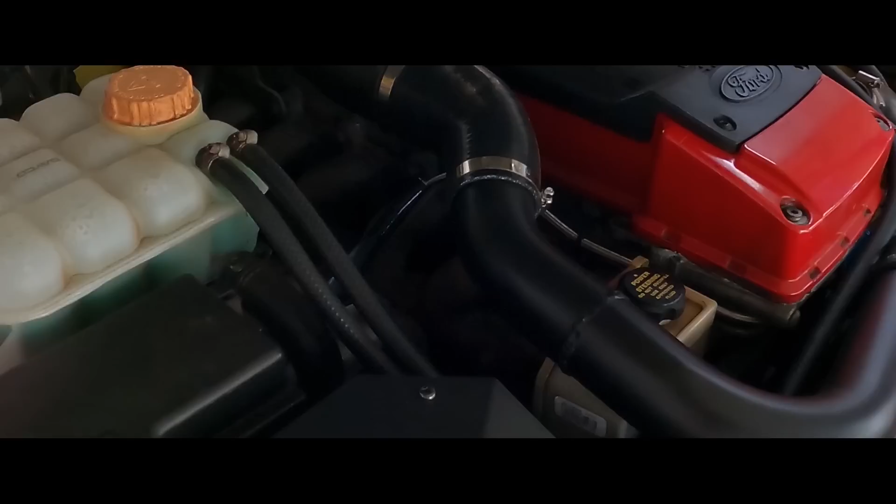It is freezing cold today, but look at what's back here. Everyone's favorite 3RZ Hilux. Look at this thing. Yeehaw. What a beast. Anyway, for those of you who remember, this thing was here previously. Turbo 3RZ, Haltech Elite 550 with a Whitey's wiring patch harness to suit the 3RZ. Yeah, really nice little setup. I can't remember exactly what turbo's on it, but we did have a couple of issues last time it was here. So it's back.

So one of the issues is the cold start. The cold start needs a revisit, which I've been working at this week. We've got it pretty good now. Pretty happy with it. I wasn't sure whether we're going to have to put an IACV in it, but it actually seems like it's doing pretty well, and I'm pretty happy with it the way it is. So might get away with not having to put an IACV in it.

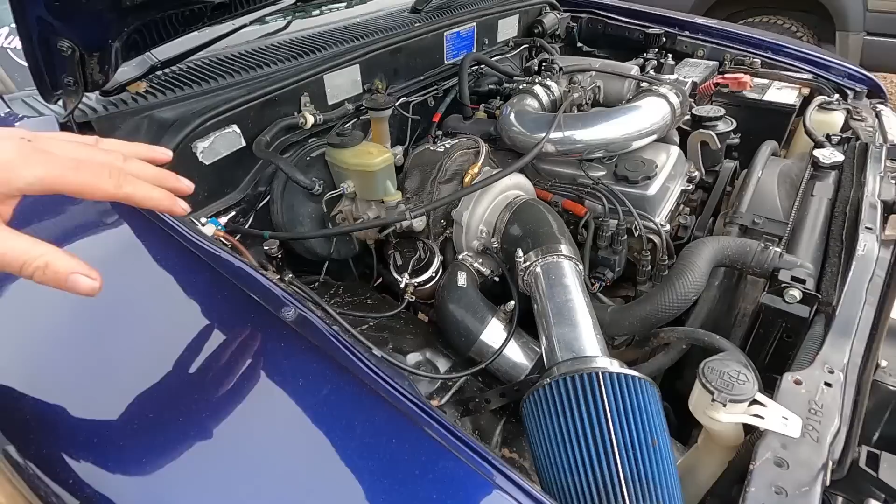But one of the big issues we had with this car when we first tried to tune it was boost control. We had a lot of issues trying to get the boost under control. Well, it's a 6 boost manifold. We've got a Turbosmart Hypergate 45, which should, in theory, suit the size of the turbo and housing on this 2.7 litre. I suppose 2.7 is quite bigger, but we just had issues controlling boost. It just kept running away on us.

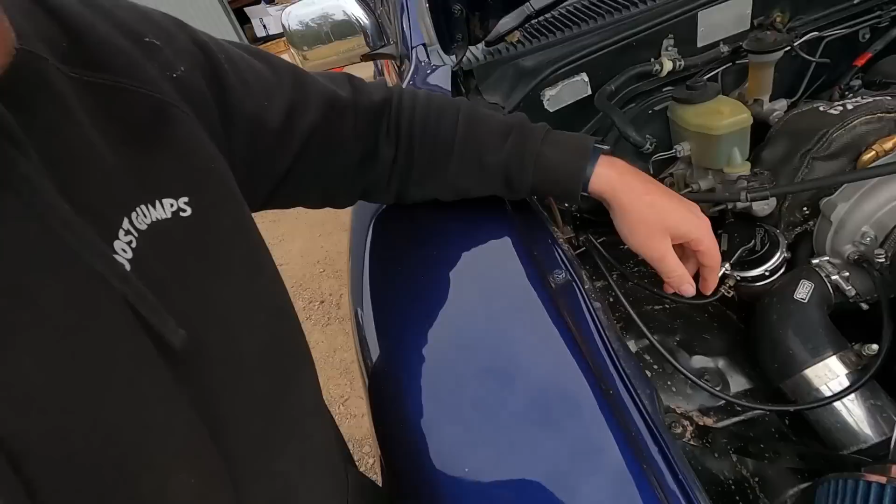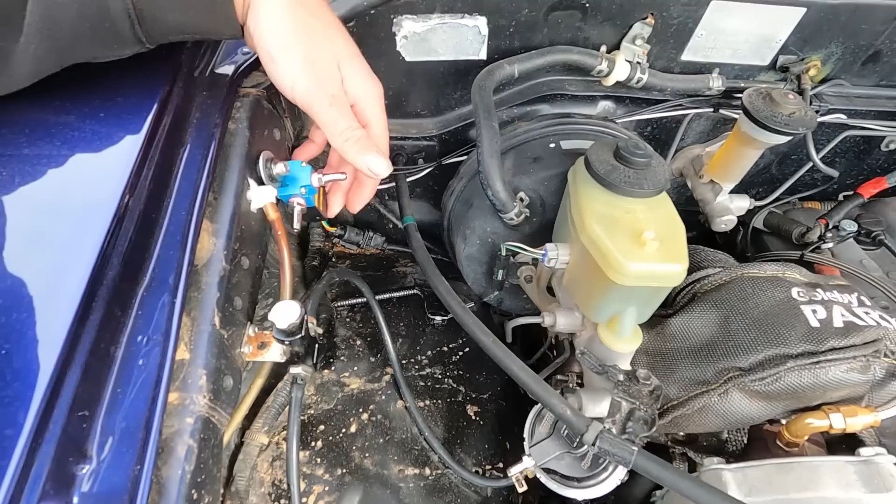And obviously at that point, we just had the trusty old Turbosmart boost tee up here. So, you know, when boost is starting to run away and the only option you've got is to bleed it off, you're really limited with what you can actually do, because you're stuck on one duty cycle, which is whatever you're bleeding off out of the boost tee. So what we've got now is actual electronic boost control from Haltech. This is wired into the Haltech, so it's ECU controlled.

And the reason this helps a lot in this situation is that we can jam heaps of duty cycle in down low, really get this thing up on gate, and then when it's starting to run away, we can start to pull the duty cycle out in those areas where we have to get it under control. But it doesn't limit us to one duty cycle across the whole board, which helps a great deal.

So a few things he wanted us to revisit as well, things like the limiter type and where it is. He wants to bring it back a bit and set it to a bit of a harder cut. He wants to be able to limiter bash up the beach, which is fair enough. Nothing too crazy, but it'll be interesting to see what we can get out of this thing. It is on bigger tires than last time, so it might actually go backwards as far as wheel horsepower is concerned. But anyway, just a revisit on the tune, get a few things nice and crispy, and get him back out having some fun.

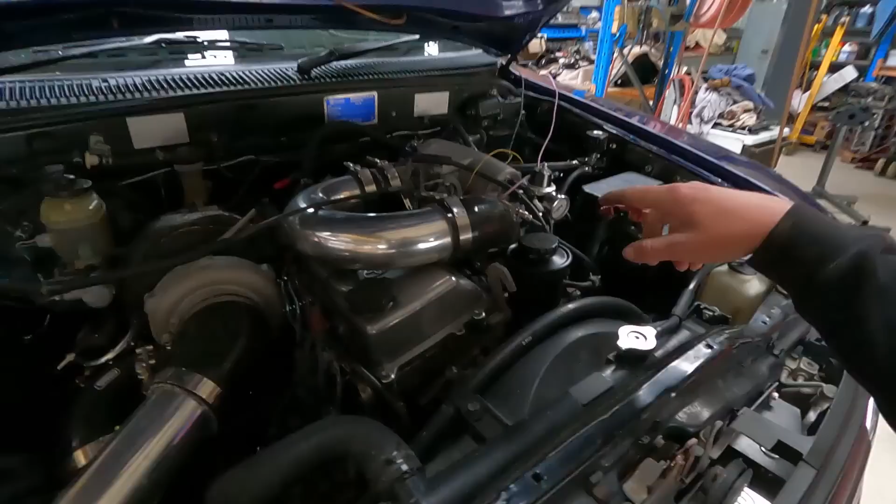So just started doing a few runs. This red is the last run from last time it was here. This is not the most power it made. This is what we turned it back down to as a safe tune because we had issues controlling boost. And I'm pretty sure we told him if he went up 2 clicks, it would go back up to pretty close to 15.5 or 16 pound, which is where we made close to 270, around that sort of power range.

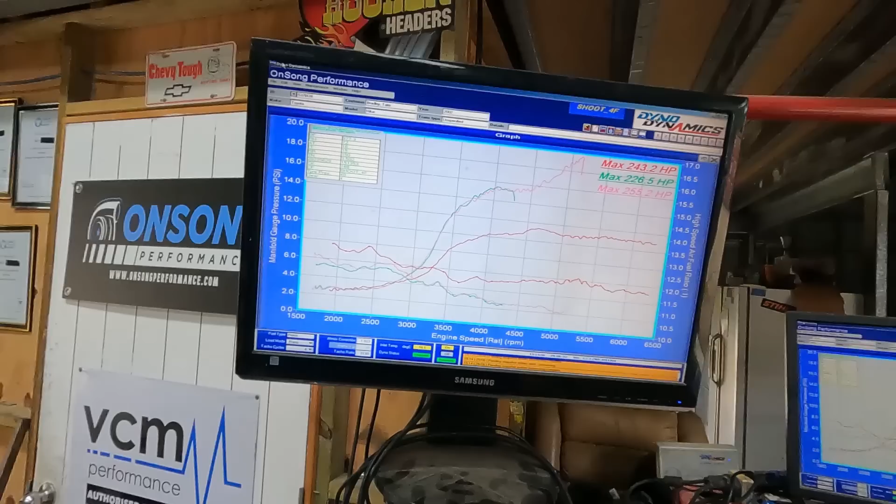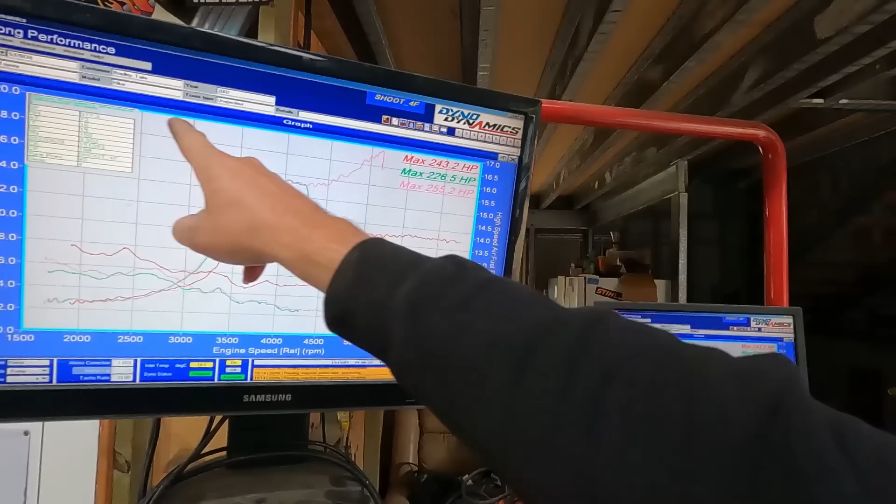He did tell me that whenever he wound it up last, he wound it up so that it was running 16 pound. But what I found here on the dyno, fully loading it up, my foot in it, is exactly what we found before: the gate's cracking, but it's just starting to run away at that boost level. So as you can see, it's starting to run out. We're starting to get up towards 20 pound there, so got out of that one. So yeah, it's not super happy with trying to run that much boost.

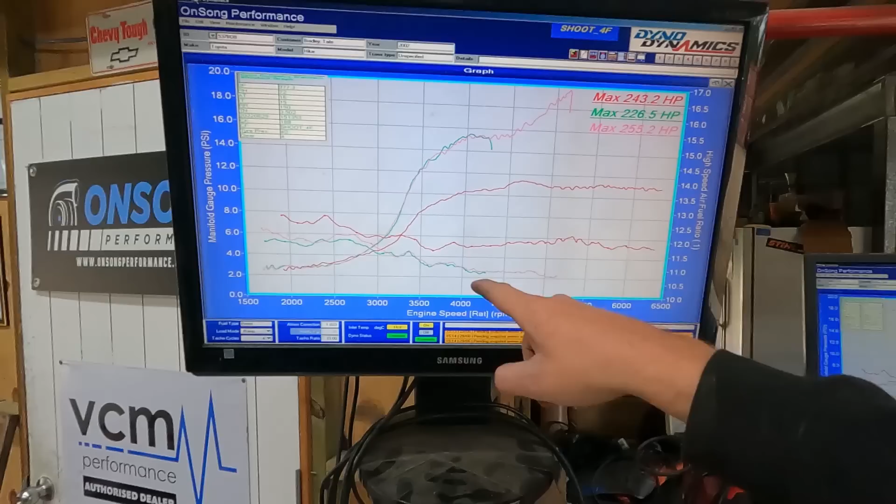Not from the boost tee, and obviously it's super rich in these areas because they weren't part of the map that I tuned previously, because we just couldn't get there. But you can see, I think this is basically a result of that new exhaust. Having that bit less back pressure is really allowing this thing to spool up quite a bit more. So there's a few of those transitional areas. But anyway, that was just a test to see where it's at.

Where he's turned it up to, it's obviously having a bit of trouble maintaining that boost pressure. It's one of those things where if you're just driving around the street or at the beach and you're just giving it stabs and stuff, you probably wouldn't really notice that much. But obviously when you load it up on a dyno and you've got consistent load for a full RPM pull, you start to really see what's going on here.

But anyway, no harm, no foul. Motor's still alive, everything's still happy. So he obviously hasn't driven the wheels off the thing to where it's done damage or anything. And it is pretty rich and fairly retarded up in that area for that reason, because we were a bit worried about it when it left last time. So anyway, that's good enough. Time now to switch us over to the Haltech boost control.

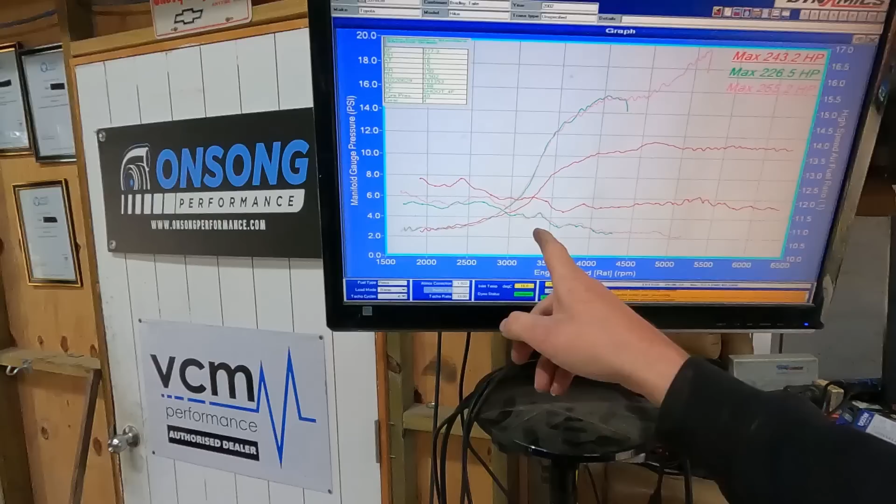And like I said, we can jam 100% duty cycle in these areas to get this thing up on gate. And then up in this area where it's starting to run away, we can just pull it all the way back to no duty cycle and hopefully try and maintain what the gas is doing. It might end up fairly linear just to try and maintain the gas flow, but it is what it is. Not much else we can do about it.

Just work around the boost control issues we've got and do the best we can with what we've got. So we'll get the boost control set up and go with that. Might even set it up with closed loop boost control this time. We'll see. All right, boys and girls, we've got problems.

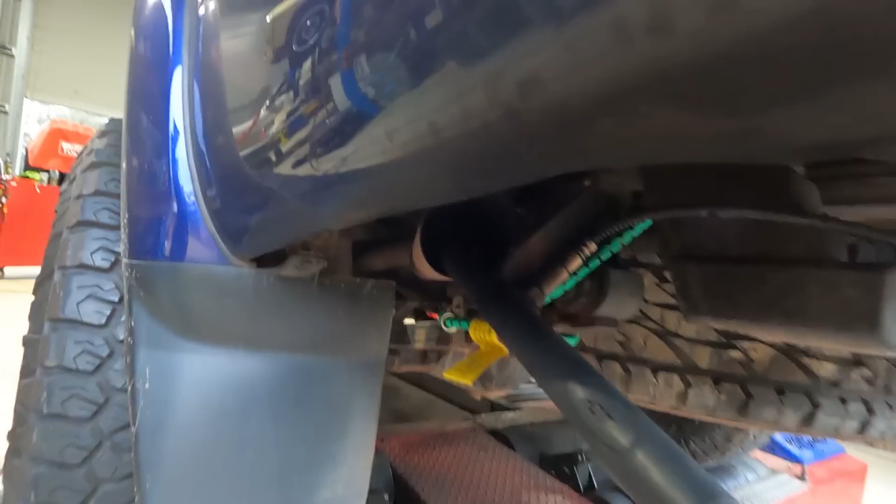First problem, I didn't realize until Rex walked around the back of the car before, but that's just not what you want. His new exhaust hasn't pointed down enough away from the cab, and it's caught the exhaust all up under the panel and just melted the tail light. So yeah, exhaust routing is important. Very sorry, Tate. Obviously I was in the car, so I didn't pick that up until Rex went for a walk and came back. So unfortunately, tail light's a bit melted.

Obviously we didn't build the exhaust, it's not really our fault. I'm just sorry that I didn't pick it up earlier before it did that sort of damage. But anyway, the second issue we've got is boost control. This thing just will not do it. So this is the same issue we were having last time.

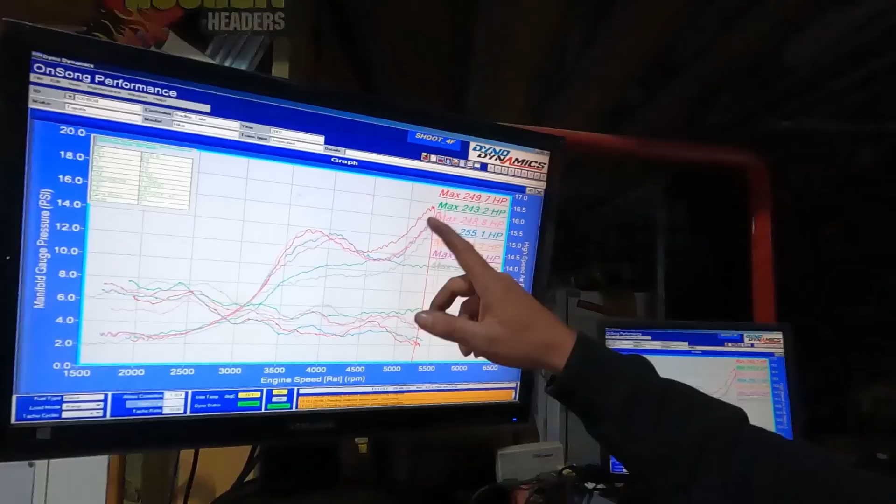It's the same issue you saw today with the boost tee, when it was turned up, just running away. Now last time with the old exhaust, we managed to keep it under control at around our 11 pound, 12 pound. We did manage to control it. It was happy enough to divert that much gas.

So what I found with this, because the tune wasn't too far off, I was like, oh, we'll have a go at setting up the closed loop when I get over to the Haltech things. Started having a go, and because of just the sheer drop off of duty cycle, I was trying to get into it to stop it from running away. The closed loop was having a bit of a shit fit. It was getting pretty hard just because it had to drop so much duty cycle so fast to try and

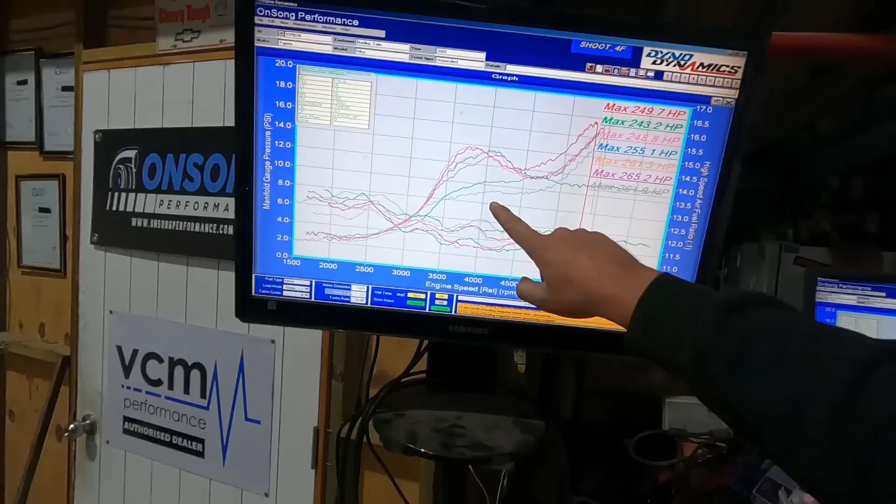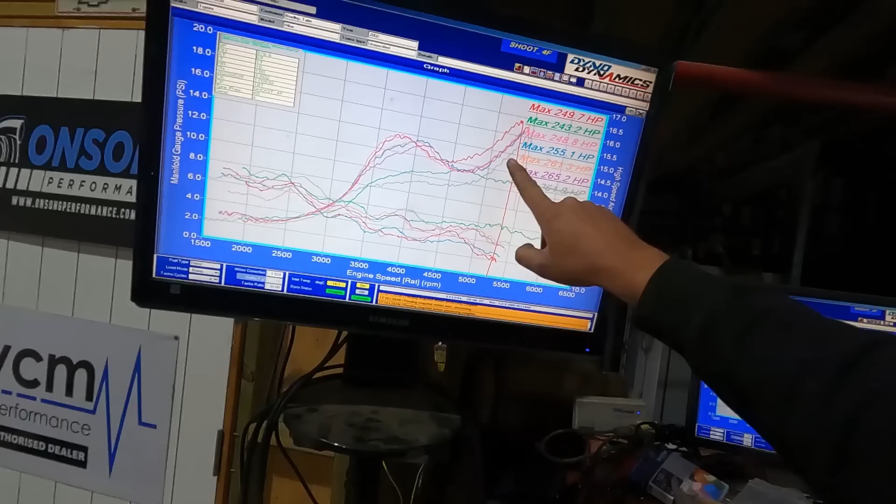control it. So I thought I'll turn all the boost control off, just run it on gate pressure and see what it does. And that was this grey run, which as you can see, just on gate pressure, nice, even rise, and then just starts to run away as well. So it's doing the same thing. It's shooting for 17 PSI by the time we're hitting about 5.5. This is a bit late, this is actually closer to about 5.2. And it's just shooting for the sky for 17 PSI.

Yeah, there's not really much else we can do. So the main difference is obviously going to be that exhaust. Being that the exhaust is a lot freer flowing now, we're obviously seeing this thing spool up a bit harder. So what you've got now with better exhaust and better flow, you've got a bigger pressure drop across the turbine. You've got a higher pressure differential across the turbine, which makes it more efficient.

So now with the bigger exhaust, it needs even less energy to do what it used to do, which means the gate has to divert more gas in order to get it back to where it was. So what we've ended up with is, because the new exhaust is making the turbine more efficient, the wastegate's having an even harder time diverting enough gas to keep it under control, to the point where even on gate pressure, this thing is just running away and there's nothing else we can do about it.

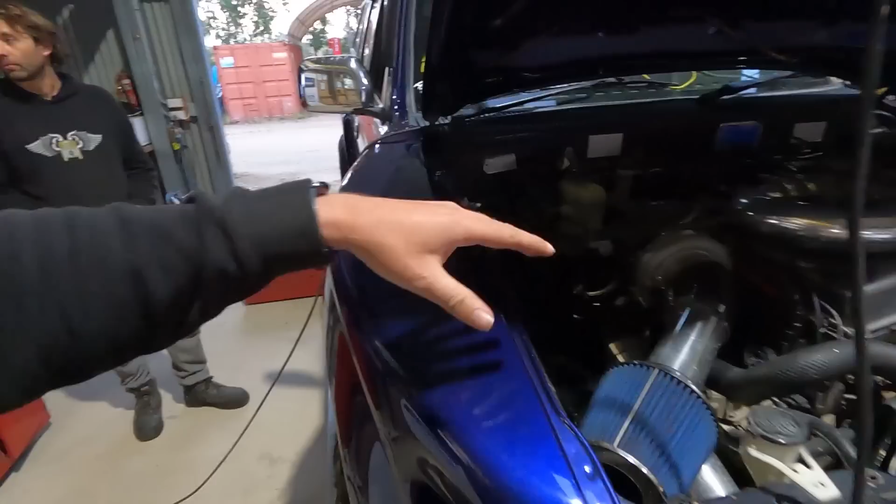So that is the issue we're facing at the moment, which is a shame, because it's not like he's half done anything. Everything here is right. We've got 6 Boost manifold, genuine Garrett, I believe it's a GTX 3076, and your Hypergate 45 from TurboSmart, which is a really good gate, and it's the size gate that the manifold

provision allows for. So basically, unfortunately, it pretty much just comes down to, I think, a not so ideal manifold design for priority flow to the gate, is what it appears to me. It's either that or the gate could just be too small. But even in that case, you'd think that the provision for the wastegate would then be a lot bigger than it is. But righto guys, well I guess at this point I'm gonna go home.

It's late today anyway, we're out of time today, but I'm gonna go home. I'm gonna have a talk to a few people that I know are 3RZ nuts. Have a chat to those guys, get a bit of an idea of what we might be able to do as far as what's safe on something completely stock. And then I'll have a chat to the owner, and I guess we'll pretty much decide at this point.

The only real point of call is if he's cool with it and everyone else reckons it might be all right, we'll just keep running it out, see what boost it ends up at. Maybe it'll start plateauing at about 20, or maybe we'll start to hit limiter by the time it's hitting about 20. And maybe at that point we just tune it to 20 pound and see how it goes.

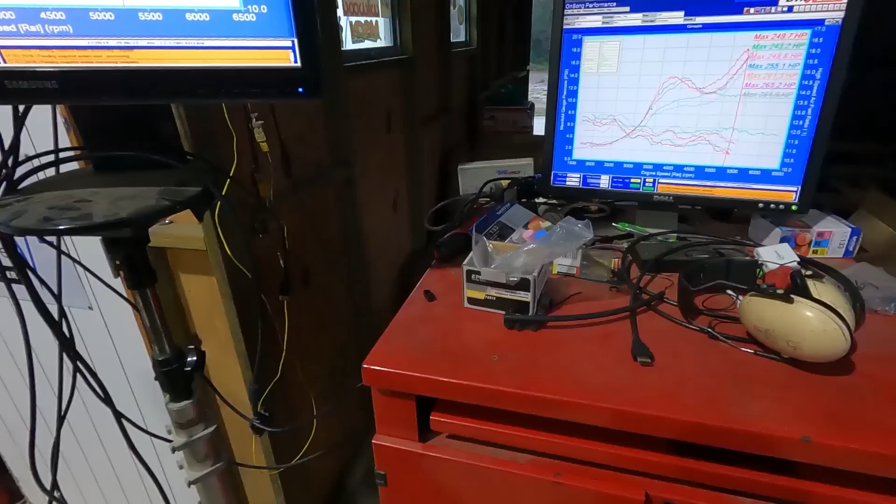What are we tuning it to? Oh, yeah, that's scary, eh? If you want to go that much further. Well, we don't have to. I'm pretty sure we set the limiter at 6, but I think power starts to fall over before then. Okay. So it's not going to be that big of a deal.

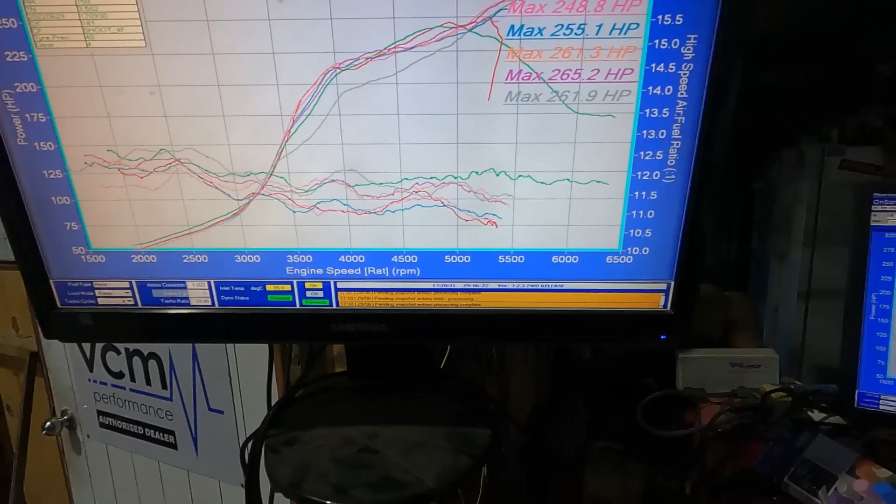So this green one's the one from before where we kept boost under control. And you see at 5 grand, power's starting to fall over anyway, with the boost control set normally. So if we only tune it to 5.5 and set the limiter to 5.5, no one's going to really miss that. Yeah, just pull it up with a limiter wherever we think is safe, and that's it. So that's probably realistically only another 300-400 RPM.

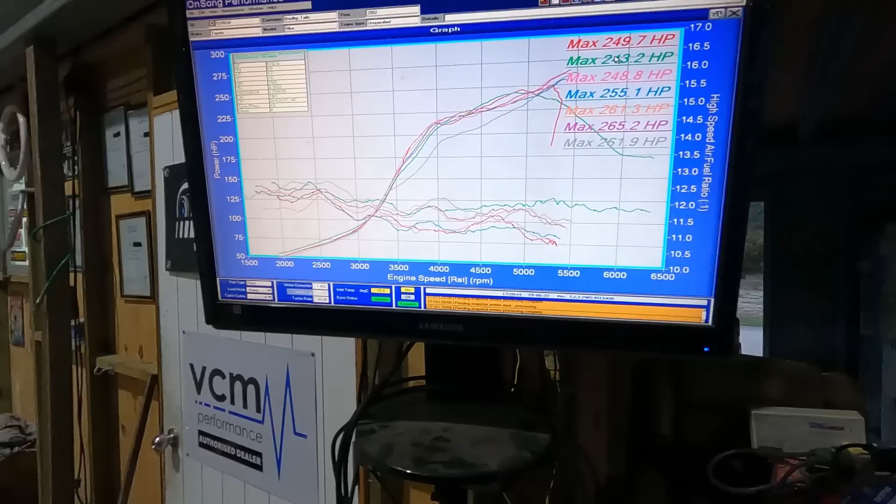How much more boost can we realistically get into it? Just knowing Toyota stuff, I would expect a 3RZ to be fine at 20 pound. I expect that it will be as well, but I just want to get confirmation from a few people and confirm that with the owner before I go running this car all the way out to 20 pound out the back door.

So, as Max and I were talking about before we started recording again, we're having boost control problems, so you can't just pull a heap of timing out at 20 pound so that it's not making power to try and keep the engine alive, because that's going to exacerbate our boost control problem. So it is a problem.

Obviously, the more timing you pull out, the more of the combustion event is happening in the exhaust stroke, which means the more energy or heat you're actually putting into the exhaust, into the runners, into the manifold. So what you're actually doing is increasing the exhaust pressure and thus increasing the boost. So just pulling timing out doesn't work for these things.

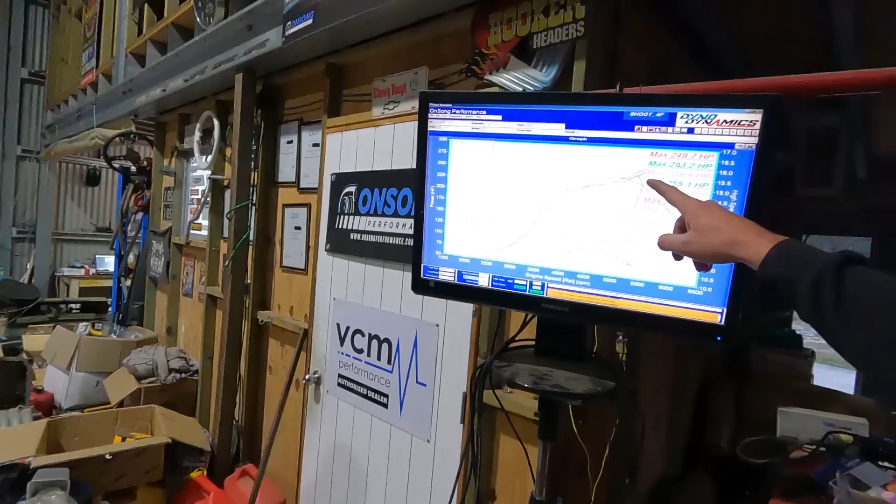Which honestly, the fact that this is spiking to 17 is probably not helping, because in those areas of the map where I didn't want it to be, I wouldn't have a lot of timing. So at those areas, it probably is getting worse. So once we start revving it out, timing would help. Yeah, maybe if we let it run out to 5.5, maybe it'll hit 20 pound as it is.

Maybe we can start throwing some more timing in up around those areas. Maybe we'll be able to get it back down and control it at around 18 or something, which might be ideal. So anyway, I'll have a chat to the owner. We'll see if he's happy to do that, and we'll go from there tomorrow.

So righto guys, I had a chat to the owner last night, as well as quite a few other people that deal a lot with 3RZs, a lot more than we do, one of them being the Hoff. I know he does a fair few RZs, so we had a bit of a chat to him. Basically what we've decided between what we found out and talking to the owner this morning is we're just going to pull this thing up at 5.5.

At the moment at that 5.5, it might go 17 to 18 pound, but right in the top end like that, it's not huge cylinder pressure, and it is controllable up until that point of 5,000 RPM. So we can control the boost input through the maximum brake torque, through the peak cylinder pressure areas, and try and keep this thing under control. It shouldn't have a problem.

As far as safety goes, that shouldn't be unsafe for this thing to be making that sort of boost right in the top end where cylinder pressure isn't super terrible. It's already fallen over at around 5,000 anyway with boost stable, so pulling it up at 5.5 I don't think is too big of a deal. And I'll have a bit more of a play around with the closed loop today.

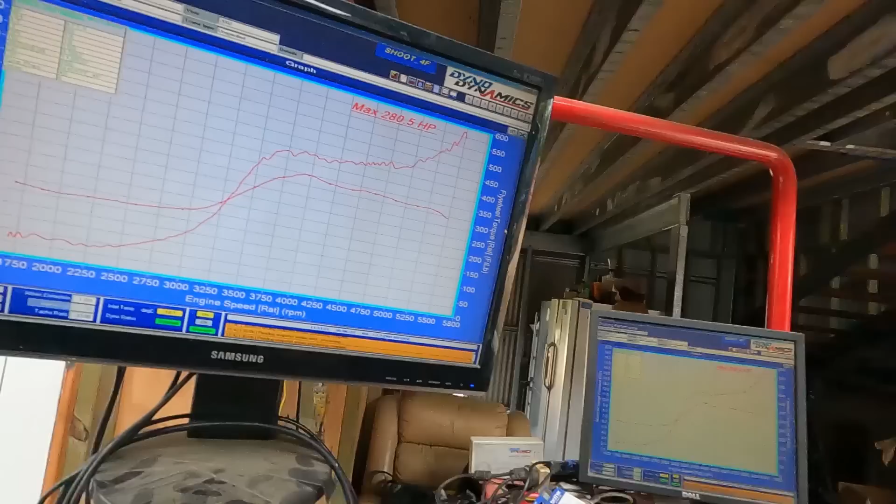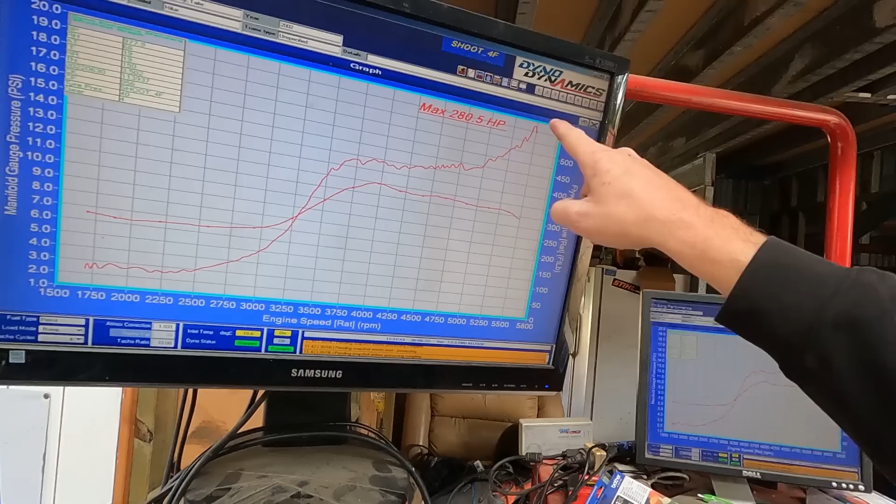As you can see, we've got maximum torque up around 4,000, and I managed to keep a fairly consistent torque level, kept a lot of the timing out of this maximum brake torque area. Boost-wise, we ended up ramping it into about 10 pound, and then tried to keep it fairly consistent through that maximum brake torque area. Didn't want to put too much boost into there and started to slowly ramp it in and let it run away up to, as you can see, this run, turned it out to 5.5.

So I was consistently doing really well with it set at 5.2, and I thought I'll just do a run at 5.5 and see what it does. And sure enough, it's starting to shoot for close to 20 pounds. So we did make our 280 at 5.5.

But I did pull another 250 RPM out. It was still quiet on the Plex, on the knock monitor. Like, it wasn't knocking, it wasn't loud. It doesn't seem too unhappy around 20 pound, but I just figured it's not really necessary. I know that he wants to take this up the beach and bop it on limiter, so it's not necessary to have it at 20 pound while he's doing that. It's just not a necessary thing.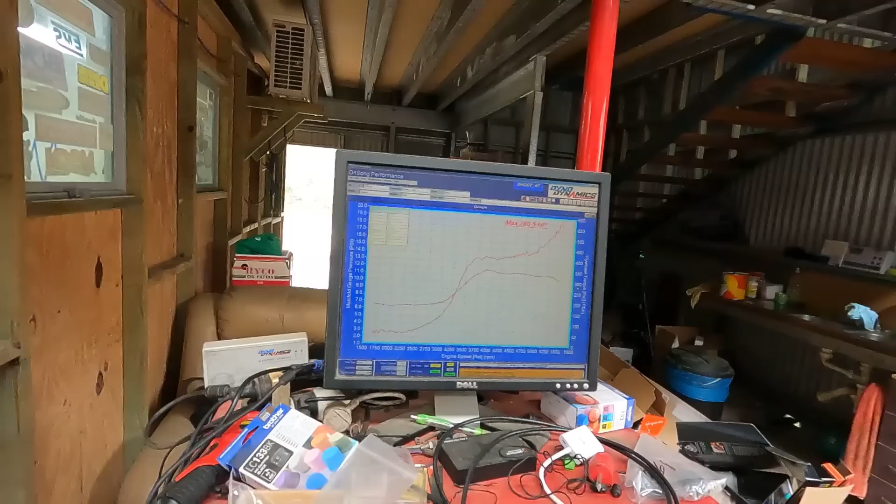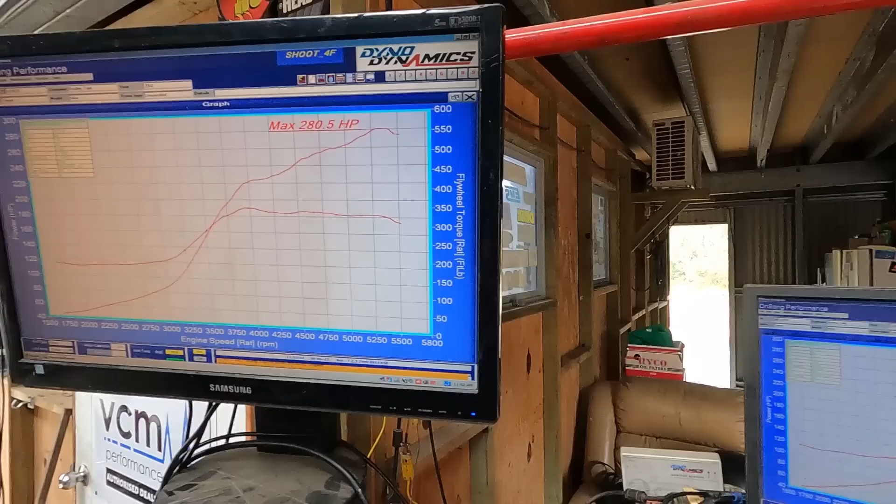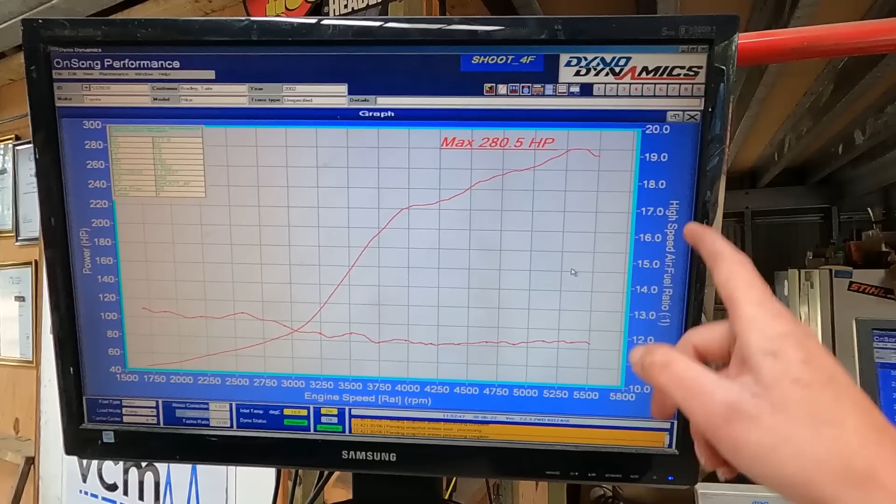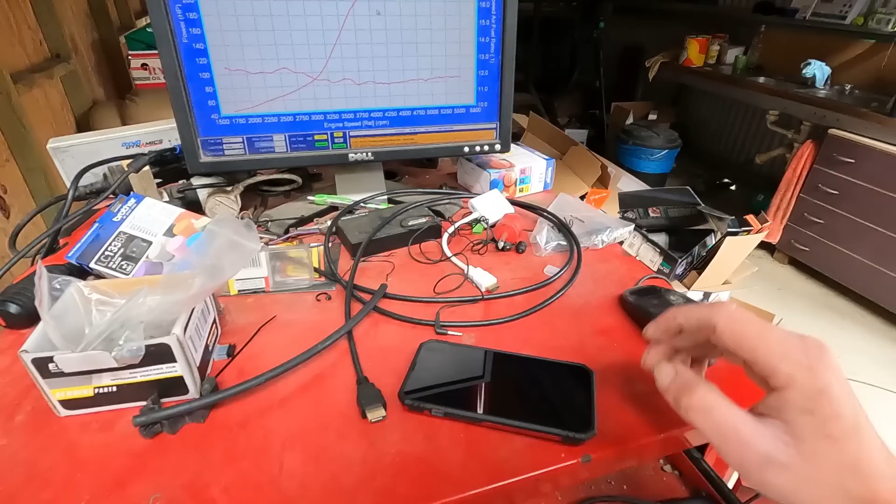So boost ended up really good, really happy with the boost curve. Our power, as you can see, we're making sort of peak power still. It still wants to go. This new exhaust has really opened it up, and it wants to just keep going. 3RZ things, I suppose. And yeah, super happy with the fuel as well. So everything's come together really well, except for, like I said, I did pull another 250 RPM out. So regular runs did stop at 5250, which, I'll pull up another run for you guys. I think the last one.

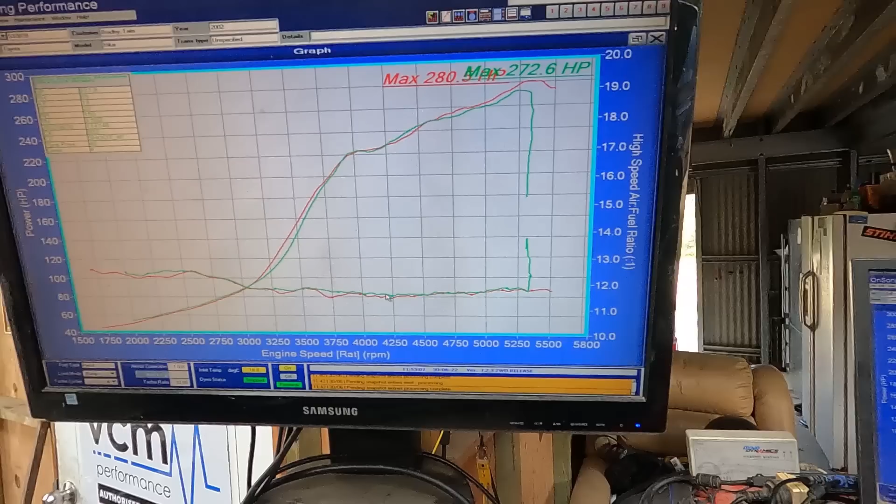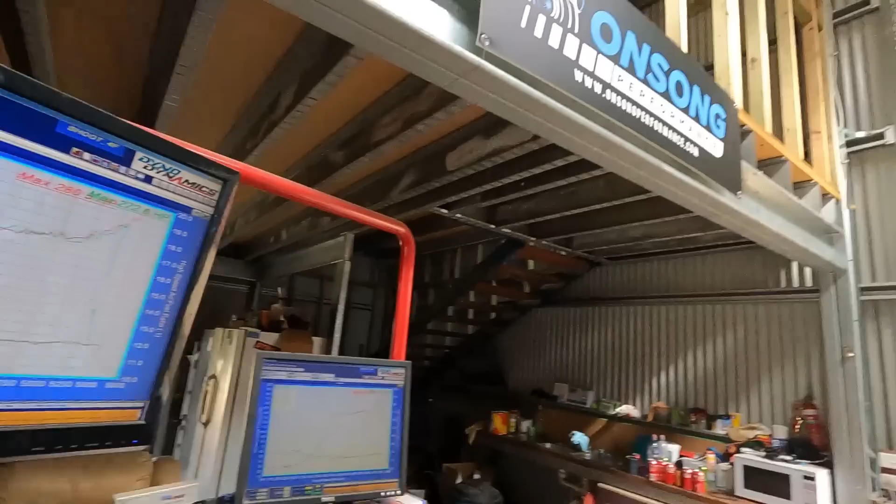So yeah, even the 272, I think it made just over 270 last time on the 32s. So the fact that we're back around that on the 33s with way less RPM now, it's a really good result. The exhaust has definitely helped the engine side of things. Obviously it didn't help our boost control issues, but the engine's a lot happier with this better exhaust on it. Took a bit more timing up in the top end, and all in all, super happy days.

Except for Tate's tail light. Sorry, Tate. My apologies. But not much really can do about it. It's more of an exhaust fault. But anyway, I do apologise. It is what it is.

So, a few things I just got to sort out on this thing. Last little bits and bobs. Get the closed loop fuel back happening again, and then we'll go for a bit of a street test and make sure it's doing everything right on the street. And have another hit at the cold start tomorrow, and it's ready for Tate to take back.

Righto guys, just got back from a street test, doing everything it should. It's actually funny, this morning Haltech must have released it, because I did check yesterday when I put it on the dyno for firmware updates, but I don't think it was there yesterday. But this morning I updated the firmware on the Elite 550, and the new firmware actually allowed me to change a lot of the limiter settings, which is awesome, because he really wanted to change them.

Because of the boost control and everything else, we don't really want to set a hard ignition cut, which is the one everyone likes the sound of, because it cuts ignition, but fuel's still going in, and fuel goes into the hot exhaust manifold at limiter, and can auto ignite and cause pressure spikes, which means you're still driving the turbine quite hard, which for something that's already running away with boost at the end of the RPM range is not what you want. So we sort of needed a fuel cut in there, but before the Elite 550 wouldn't allow you to do both.